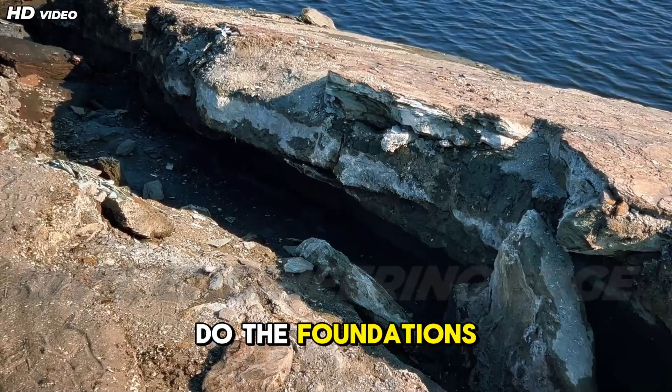Imagine a 20-mile bridge stretching across deep, storm-lashed ocean waters supporting thousands of vehicles every hour. Now imagine the earth beneath it rupturing violently. A magnitude 9 earthquake strikes without warning. What happens next? Do the towers snap? Do the foundations fail? Or does the bridge survive?

Welcome to Civil Engineering Edge, where today we dive into one of the most terrifying challenges in modern infrastructure: protecting colossal sea bridges from seismic annihilation. We're uncovering the groundbreaking seismic isolation systems, energy-dissipating technologies, and revolutionary foundation designs that allow these giants to defy the planet's most violent shudders. Stay with us because what keeps these titans standing will truly amaze you.

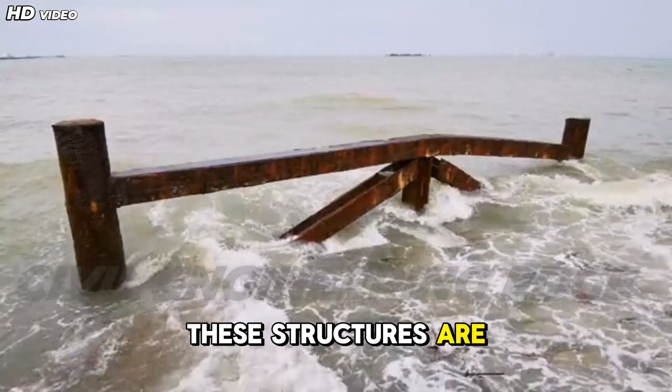Mega sea bridges represent the pinnacle of human ambition in civil engineering. Unlike conventional bridges, these structures are built in deep water, exposed to waves, currents, typhoons, corrosion, and most critically seismic forces originating beneath unstable seabeds. What makes these bridges extraordinary is not just their length or height, but the complex interaction of forces acting on them simultaneously. During an earthquake, a sea bridge doesn't just shake, it moves differently at every support, while water, soil, and structure respond together as a coupled system.

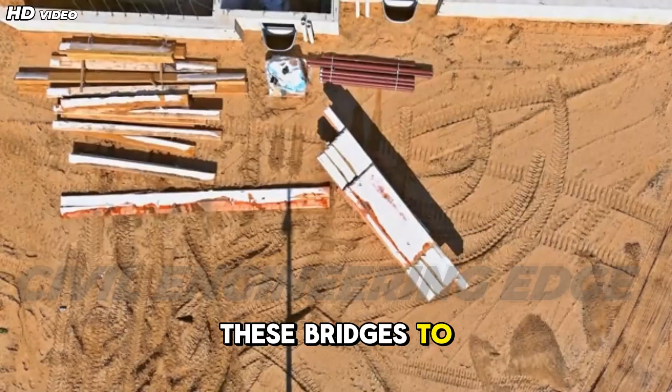This dynamic behavior demands a completely new design philosophy. Modern engineers no longer design these bridges to be rigid. Instead, they are engineered to move intelligently to absorb, redirect, and dissipate seismic energy without catastrophic failure. Flexible pylons, seismic bearings, dampers, and foundations capable of controlled deformation are now central to design.

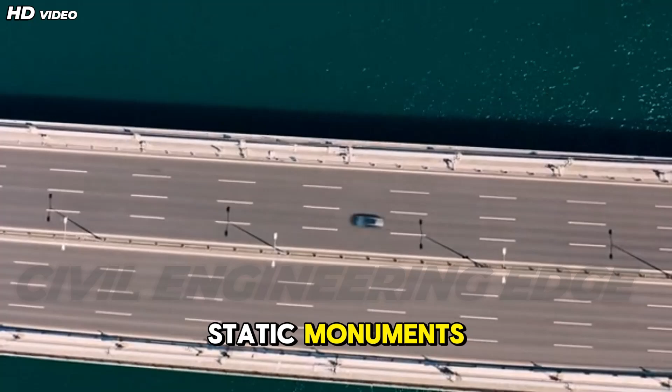Mega sea bridges are no longer static monuments of concrete and steel. They are living structural systems engineered to adapt to a shifting Earth. Every design decision from tower geometry to pile embedment depth is guided by performance-based seismic design, ensuring survival under worst-case earthquake scenarios. The impossible scale: why mega sea bridges in seismic zones are humanity's ultimate engineering challenge.

Building a mega sea bridge in a seismic zone is often described as engineering against nature itself. The scale alone is overwhelming: kilometers of span length, towers taller than skyscrapers, foundations embedded deep into the ocean floor. Now add earthquakes to the equation, and the challenge multiplies exponentially.

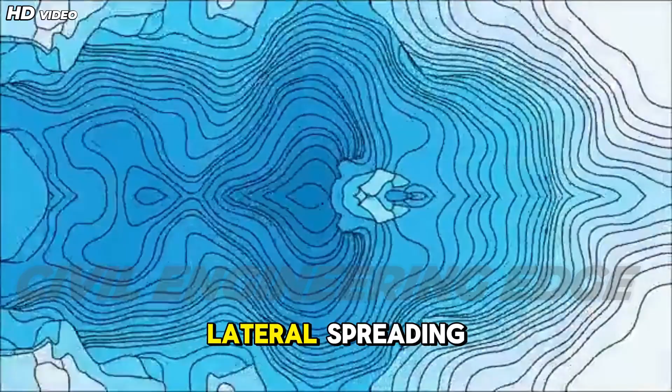Unlike land-based structures, sea bridges are founded on soft marine sediments, which amplify seismic waves and increase ground motion. Phenomena such as liquefaction, lateral spreading, and seabed fault rupture can occur simultaneously, threatening the stability of foundations. Traditional design assumptions simply do not apply.

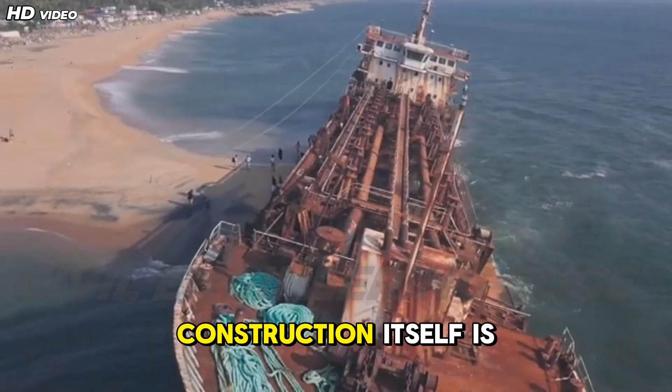Additionally, seismic waves do not arrive uniformly. One pier may experience peak acceleration seconds before another, creating asynchronous loading that twists and stretches the structure. Expansion joints, bearings, and cables must accommodate massive displacements without losing load-carrying capacity. Construction itself is a challenge, installing piles hundreds of meters long with millimeter-level precision in moving water, all while accounting for future seismic demands.

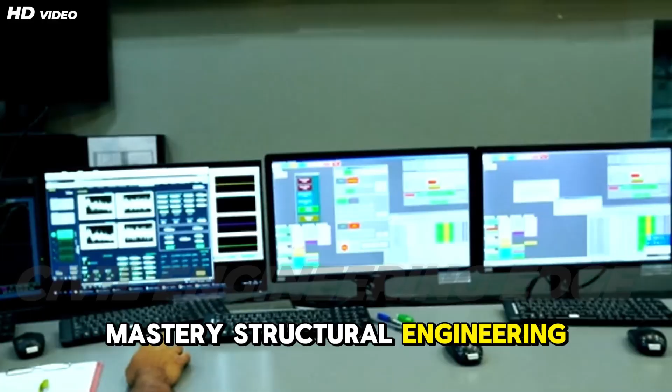This is why mega sea bridges in seismic zones are considered the ultimate test of civil engineering expertise. They demand interdisciplinary mastery: structural engineering, geotechnics, materials science, ocean engineering, and advanced computation working together in perfect harmony. Bridging continents, defying quakes: iconic mega bridges pushing the limits.

Some of the world's most ambitious sea bridges are already proving that seismic resilience is achievable. Take the Hong Kong-Zhuhai-Macau Bridge, a 55-kilometer megalink constructed in one of the world's most seismically active and typhoon-prone regions. Designed to withstand magnitude 8 earthquakes, it incorporates seismic isolation bearings, massive steel-concrete composite towers, and deep pile foundations socketed into bedrock. Japan offers even more striking examples.

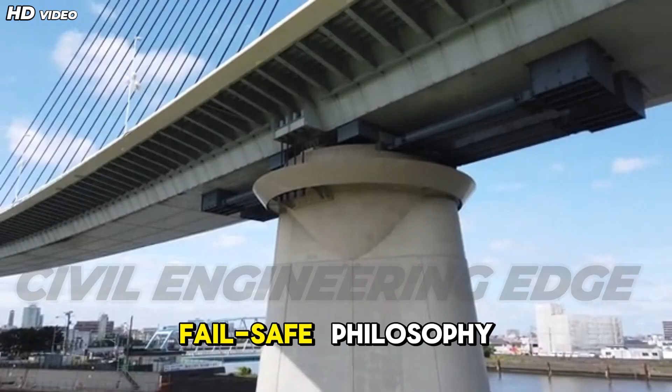Located on the Pacific Ring of Fire, Japanese sea bridges are engineered with a fail-safe philosophy. Structures like the Akashi Kaikyo Bridge use tuned mass dampers, flexible steel towers, and advanced seismic sensors that allow controlled movement during earthquakes, preventing collapse while preserving structural integrity.

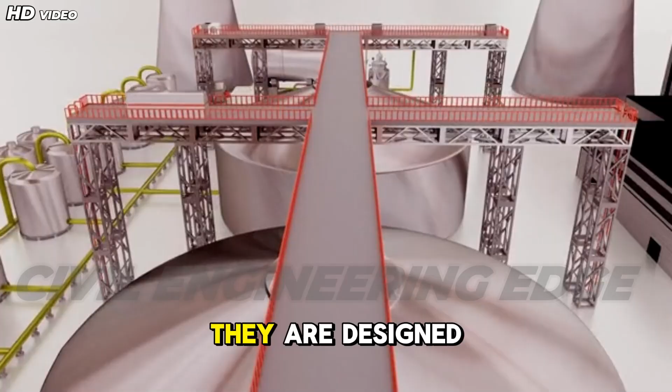What unites these bridges is not brute strength, but intelligent flexibility. They are designed to deform without breaking, dissipating seismic energy through bearings, dampers, and sacrificial elements. These projects demonstrate that with the right technology and design philosophy, engineers can bridge continents while defying earthquakes, setting new global benchmarks for resilient infrastructure.

The invisible threat: seismic risks anchored in volatile ocean floors. The most dangerous enemy of mega sea bridges is not visible, it lies beneath the ocean floor. Marine seismic conditions are uniquely complex. Earthquake waves travel through layers of water, soft sediments, fractured rock, and fault zones before reaching the structure. These layers distort, amplify, and prolong ground motion, subjecting foundations to extreme cyclic loads.

One of the greatest risks is soil liquefaction, where saturated sand temporarily behaves like a liquid during shaking. This can cause piles to lose lateral support, leading to excessive displacement or even collapse. Fault rupture beneath foundations poses another severe threat, capable of offsetting piles and piers by meters.

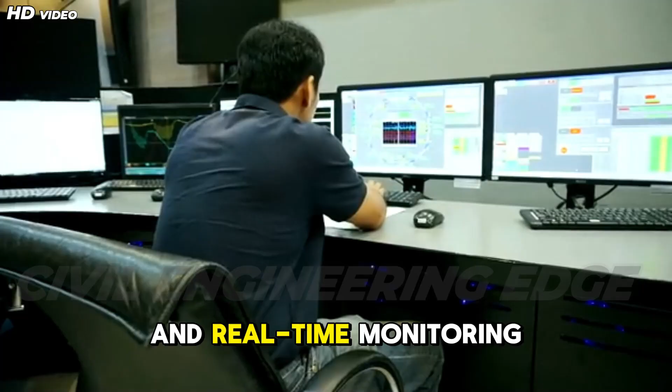Engineers combat these invisible dangers using deep-seated foundations, ground improvement techniques, seismic isolation at the foundation level, and real-time monitoring systems. Advanced numerical modeling such as nonlinear time history analysis and soil-structure-fluid interaction simulations allows engineers to predict how bridges will behave during extreme events before construction even begins. Understanding and controlling these hidden seismic risks is what transforms mega sea bridges from vulnerable giants into resilient lifelines capable of standing strong when the Earth itself turns hostile.

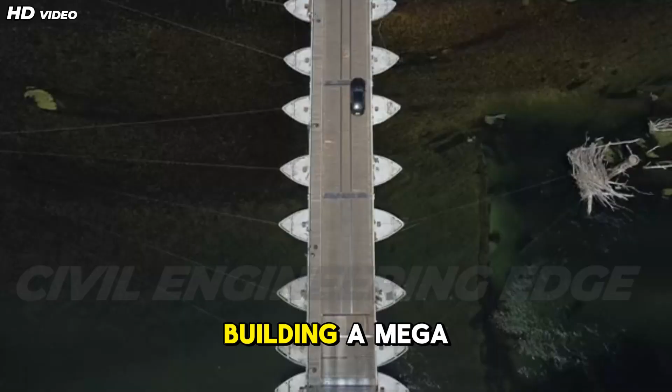The impossible scale. Why mega sea bridges in seismic zones are humanity's ultimate engineering challenge. Building a mega sea bridge in a seismic zone is often described as engineering against nature itself. The scale alone is overwhelming: kilometers of span length, towers taller than skyscrapers, foundations embedded deep into the ocean floor. Now add earthquakes to the equation, and the challenge multiplies exponentially.

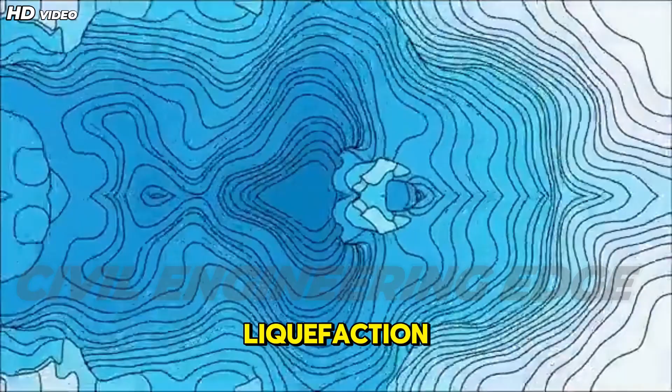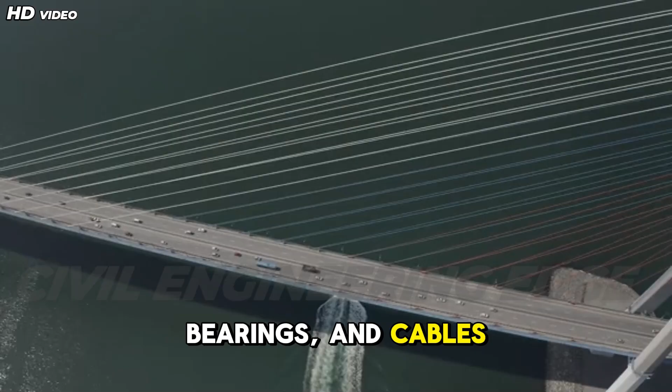Unlike land-based structures, sea bridges are founded on soft marine sediments, which amplify seismic waves and increase ground motion. Phenomena such as liquefaction, lateral spreading, and seabed fault rupture can occur simultaneously, threatening the stability of foundations. Traditional design assumptions simply do not apply. Additionally, seismic waves do not arrive uniformly. One pier may experience peak acceleration seconds before another, creating asynchronous loading that twists and stretches the structure. Expansion joints, bearings, and cables must accommodate massive displacements without losing load-carrying capacity.

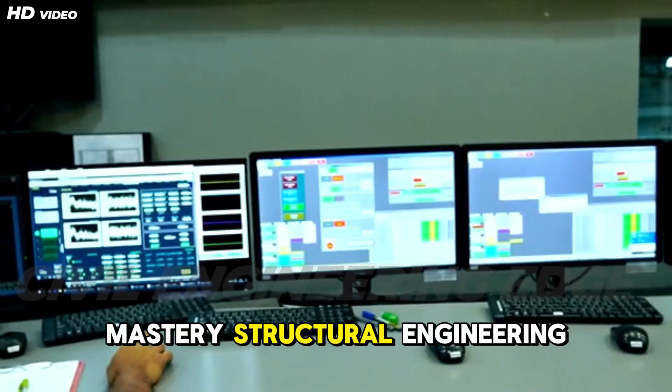Construction itself is a challenge, installing piles hundreds of meters long with millimeter-level precision in moving water, all while accounting for future seismic demands. This is why mega sea bridges in seismic zones are considered the ultimate test of civil engineering expertise. They demand interdisciplinary mastery: structural engineering, geotechnics, materials science, ocean engineering, and advanced computation working together in perfect harmony.

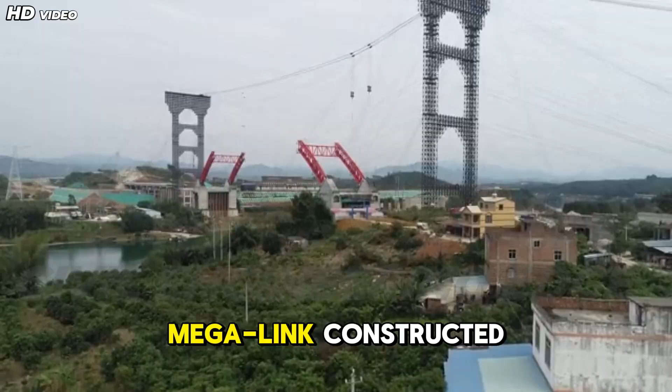Bridging continents, defying quakes: iconic mega bridges pushing the limits. Some of the world's most ambitious sea bridges are already proving that seismic resilience is achievable. Take the Hong Kong-Zhuhai-Macau Bridge, a 55-kilometer megalink constructed in one of the world's most seismically active and typhoon-prone regions. Designed to withstand magnitude 8 earthquakes, it incorporates seismic isolation bearings, massive steel-concrete composite towers, and deep pile foundations socketed into bedrock.

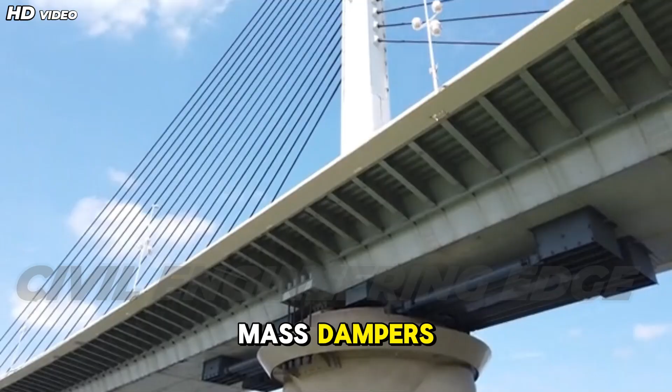Japan offers even more striking examples. Located on the Pacific Ring of Fire, Japanese sea bridges are engineered with a fail-safe philosophy. Structures like the Akashi Kaikyo Bridge use tuned mass dampers, flexible steel towers, and advanced seismic sensors that allow controlled movement during earthquakes, preventing collapse while preserving structural integrity.

What unites these bridges is not brute strength, but intelligent flexibility. They are designed to deform without breaking, dissipating seismic energy through bearings, dampers, and sacrificial elements. These projects demonstrate that with the right technology and design philosophy, engineers can bridge continents while defying earthquakes, setting new global benchmarks for resilient infrastructure.

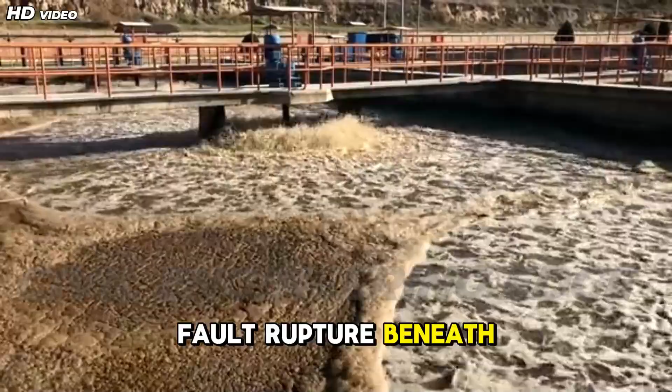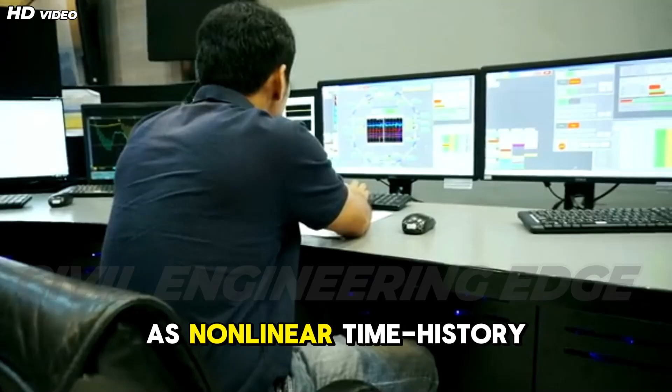The invisible threat: seismic risks anchored in volatile ocean floors. The most dangerous enemy of mega sea bridges is not visible, it lies beneath the ocean floor. Marine seismic conditions are uniquely complex. Earthquake waves travel through layers of water, soft sediments, fractured rock, and fault zones before reaching the structure. These layers distort, amplify, and prolong ground motion, subjecting foundations to extreme cyclic loads. One of the greatest risks is soil liquefaction, where saturated sand temporarily behaves like a liquid during shaking. This can cause piles to lose lateral support, leading to excessive displacement or even collapse. Fault rupture beneath foundations poses another severe threat, capable of offsetting piles and piers by meters. Engineers combat these invisible dangers using deep-seated foundations, ground improvement techniques, seismic isolation at the foundation level, and real-time monitoring systems. Advanced numerical modeling such as nonlinear time history analysis and soil-structure-fluid interaction simulations allows engineers to predict how bridges will behave during extreme events before construction even begins. Understanding and controlling these hidden seismic risks is what transforms mega sea bridges from vulnerable giants into resilient lifelines, capable of standing strong when the Earth itself turns hostile.

Dancing with tremors: the art of seismic isolation. When earthquakes strike, traditional thinking suggests resisting motion with brute strength. But modern seismic engineering follows a radically different philosophy: let the structure move, but control how it moves.

This idea lies at the heart of seismic isolation, a design strategy that allows mega sea bridges to dance with seismic forces rather than fight them. Seismic isolation works by decoupling the superstructure from destructive ground motion. Instead of transmitting earthquake energy directly from the foundation into the towers and deck, isolation systems act as a buffer layer. They filter and reshape seismic waves, dramatically reducing acceleration, internal forces, and structural damage.

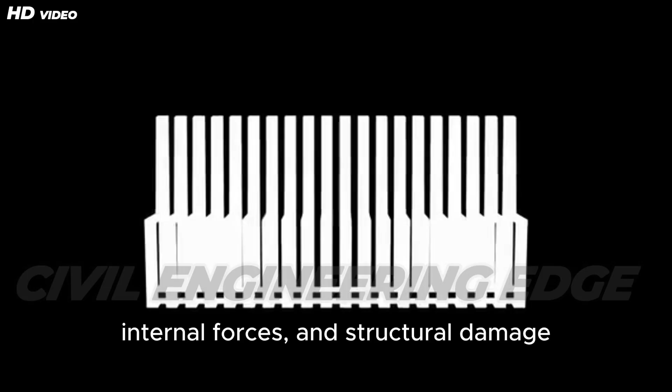For mega sea bridges, isolation is especially critical. Earthquake motions beneath the seabed are often amplified by soft marine soils and arrive asynchronously at different piers. Isolation systems allow each support to respond independently while preserving global stability. The result is a structure that moves smoothly, slowly, and predictably even during violent ground shaking.

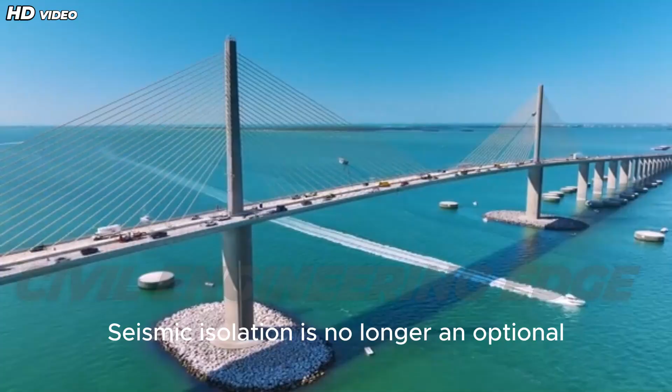Rather than sharp, brittle failure, isolated bridges exhibit large but controlled displacements, protecting key structural elements like pylons, cables, and deck connections. This approach not only prevents collapse, but also ensures post-earthquake serviceability, which is vital for emergency response and economic continuity. Seismic isolation is no longer an optional enhancement, it is an essential design philosophy for next-generation sea bridges in earthquake-prone regions.

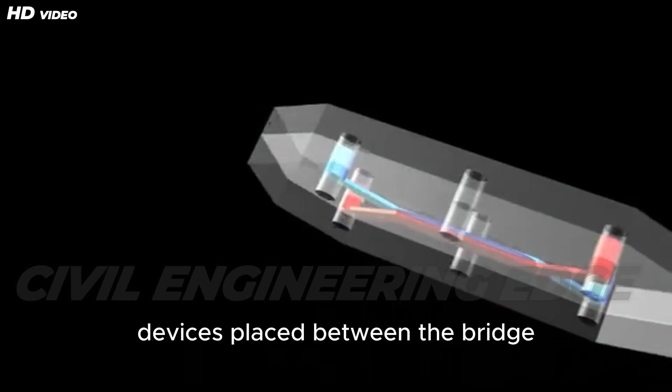Uncoupling the beast: how base isolation bearings let bridges float. At the core of seismic isolation are base isolation bearings, engineered devices placed between the bridge superstructure and its foundations. Their job is simple in concept, but revolutionary in impact: uncouple the bridge from ground motion. One of the most widely used systems is the lead rubber bearing (LRB).

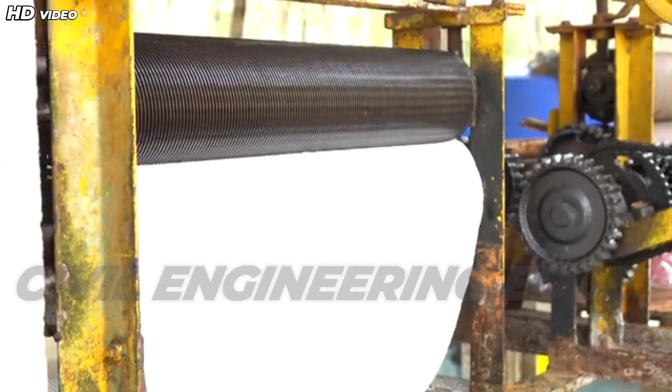These bearings consist of alternating layers of rubber and steel with a solid lead core at the center. During an earthquake, the rubber layers provide flexibility, allowing horizontal movement, while the lead core yields plastically, dissipating seismic energy as heat. This combination reduces transmitted acceleration while providing restoring force to recenter the bridge after shaking stops.

Another advanced system is the friction pendulum bearing (FPB). These bearings allow the bridge deck to slide along a curved, concave surface during seismic motion. The brilliance of this system lies in physics. The sliding motion increases the natural period of the structure, moving it away from the dominant earthquake frequencies. Gravity then acts as a natural restoring force, pulling the bridge back to its original position.

In mega sea bridges, these bearings can allow displacements of hundreds of millimeters without structural damage. To an observer, it appears as if the bridge is calmly floating, while the ground beneath it convulses violently. This intentional flexibility transforms earthquakes from catastrophic events into manageable motions, redefining how engineers protect massive structures.

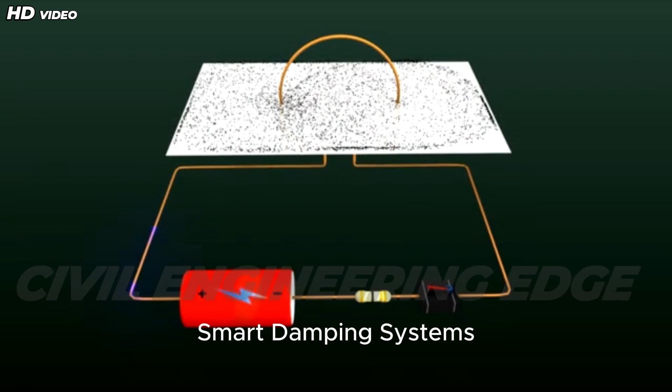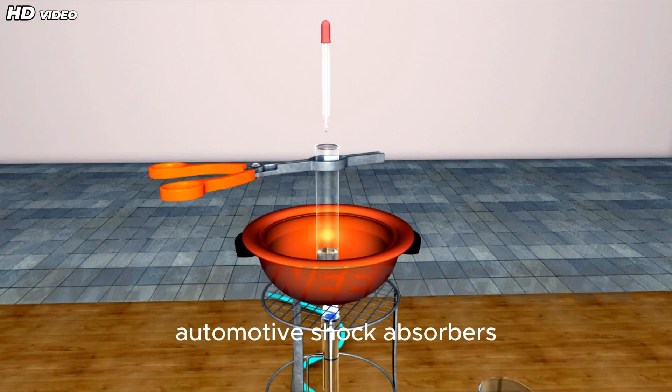Smart damping systems: viscous dampers and tuned mass dampers explained. While isolation systems reduce how much earthquake energy enters the structure, damping systems control what happens to the energy that does get in. This is where smart damping devices play a critical role. Viscous dampers function much like automotive shock absorbers. Filled with high viscosity fluid, these devices resist motion by converting kinetic energy into heat as fluid is forced through narrow orifices. During an earthquake, viscous dampers generate forces proportional to velocity, making them highly effective in reducing both displacement and acceleration.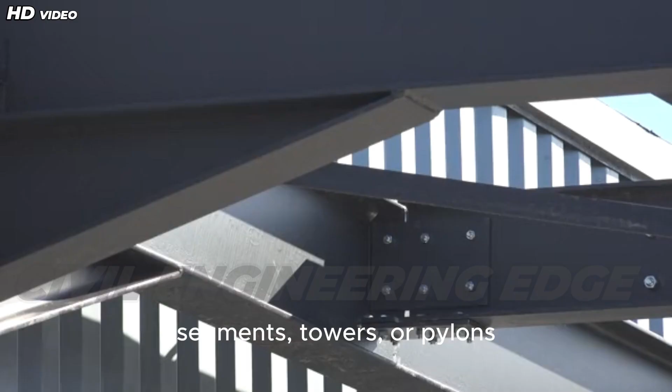In mega sea bridges, viscous dampers are often installed between deck segments, towers, or pylons. They are especially effective in controlling long-period motions common in large-span structures. Their performance is stable, predictable, and effective across a wide range of earthquake intensities.

Tuned mass dampers (TMDs) take a different approach. These systems consist of a large secondary mass, tuned to move out of phase with the bridge's primary vibration mode. When the structure begins to sway, the TMD oscillates in the opposite direction, canceling out motion and reducing amplitude. For sea bridges, TMDs are often placed inside towers or beneath decks to control wind and earthquake-induced vibrations. Together, viscous dampers and TMDs transform violent seismic energy into controlled, dissipated motion, protecting structural integrity and extending service life.

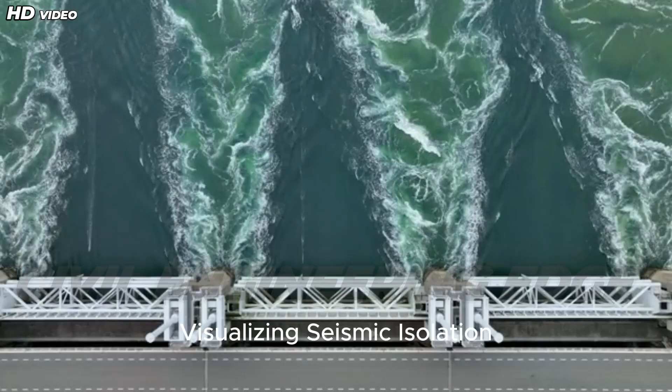Real-world application: visualizing seismic isolation through animated simulations. Understanding seismic isolation truly clicks when we see it in motion. Modern engineering relies heavily on animated simulations and digital twins to visualize how mega sea bridges behave during earthquakes. In these simulations, seismic waves propagate through the seabed, shaking the foundations violently. Without isolation, the bridge deck mirrors this motion: rapid acceleration, large internal forces, and potential failure points.

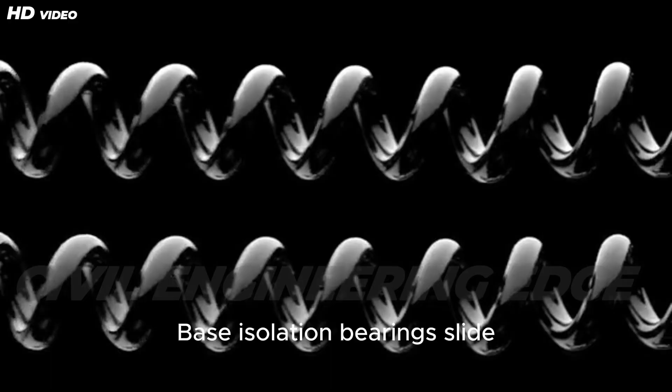But when isolation systems are activated, the difference is dramatic. The foundation moves aggressively, yet the deck above glides smoothly. Base isolation bearings slide, flex, and rotate, allowing controlled horizontal displacement. Viscous dampers glow in simulations as energy is absorbed and dissipated. Tuned mass dampers swing rhythmically, counteracting structural motion.

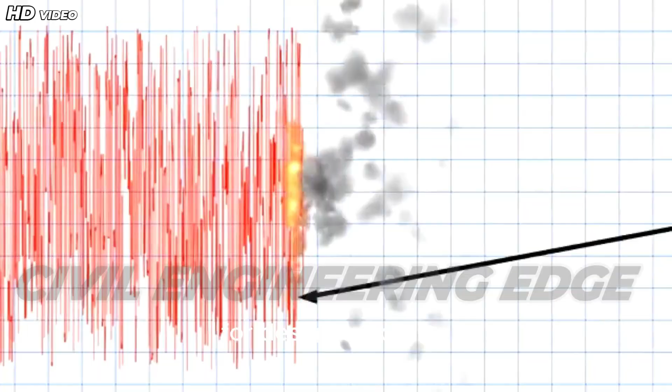Engineers use nonlinear time history analysis to simulate real earthquake records, sometimes thousands of scenarios, ensuring performance even under worst-case conditions. These visual tools are invaluable for design validation, stakeholder communication, and safety approval for students and professionals alike.

These simulations reveal a powerful truth. Seismic resilience is not about rigidity, it's about orchestrated motion. Mega sea bridges don't resist earthquakes. They dance with them, moving gracefully through chaos and emerging intact.

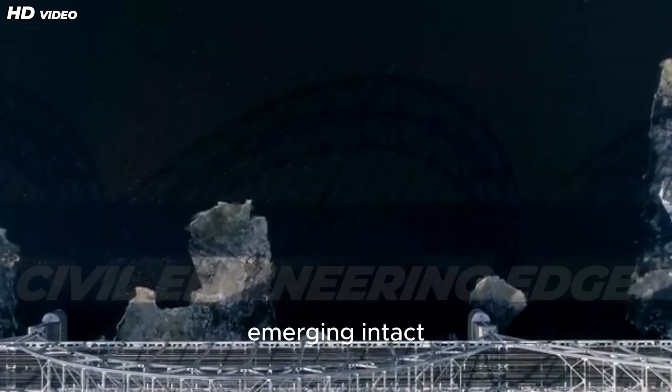Groundbreaking foundations, anchoring giants to the deep. For mega sea bridges, the most critical structural elements are the ones no one sees. Hidden beneath waves and sediment, foundations carry the fate of the entire structure. When earthquakes strike, superstructures may sway and isolate, but if foundations fail, collapse is inevitable.

Unlike land-based bridges, sea bridges are anchored into complex, layered marine geology: soft clays, loose sands, fractured rock, and active fault zones. Seismic waves passing through these layers amplify motion, generate pore water pressure, and threaten stability. Engineers must therefore design foundations not just for strength, but for survivability under extreme deformation.

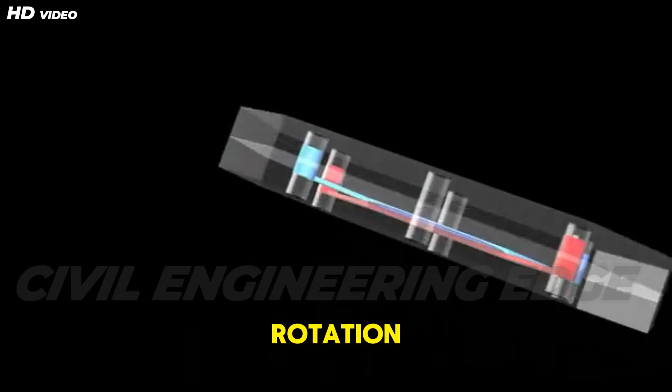Modern foundation design embraces redundancy, ductility, and adaptability. Engineers allow controlled rotation, bending, and energy dissipation at the foundation level while preventing brittle failure. This approach transforms foundations from passive supports into active seismic-resisting systems.

Advanced geotechnical engineering has made it possible to anchor massive pylons in depths exceeding 100 meters, ensuring stability even under combined loads from earthquakes, waves, currents, and ship impact. These foundations are the silent guardians of mega sea bridges, enduring forces far beyond what the eye can see.

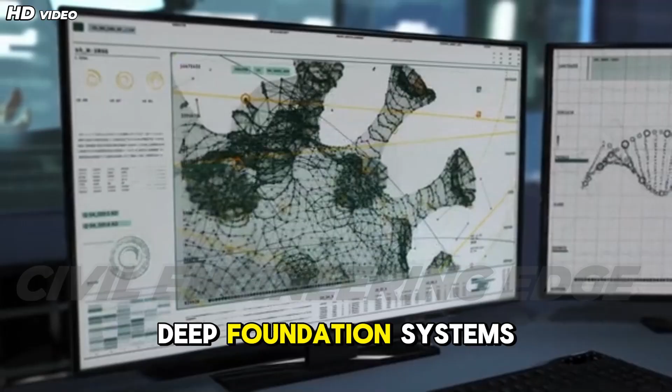Beyond bedrock: deep foundations in challenging marine geology. In many marine environments, reaching competent bedrock is either impractical or impossible. Instead, engineers rely on innovative deep foundation systems capable of performing reliably in weak or highly variable soils.

Large diameter drilled shafts, often exceeding 6 to 10 meters in diameter, are among the most effective solutions. These shafts extend deep into the seabed, developing capacity through a combination of end bearing and side friction. During seismic events, their massive stiffness and ductility allow them to resist lateral loads and bending moments while accommodating cyclic deformation.

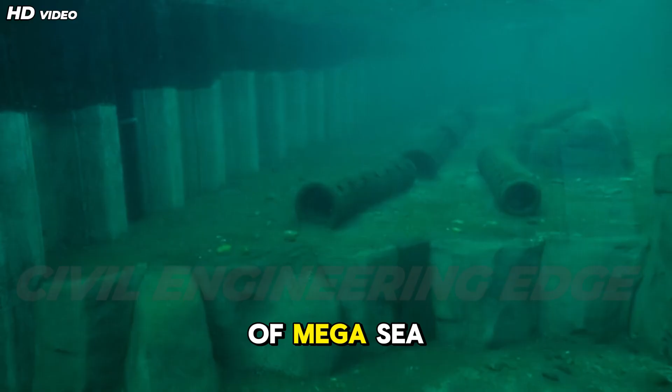Caisson foundations, both open and pneumatic types, are another cornerstone of mega sea bridge construction. These hollow, box-like structures are sunk into the seabed and filled with reinforced concrete, forming extremely stable bases. Caissons distribute loads over large areas, reducing stress concentration and improving seismic performance.

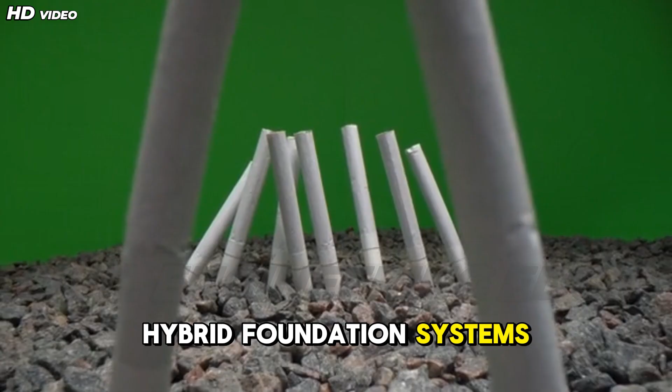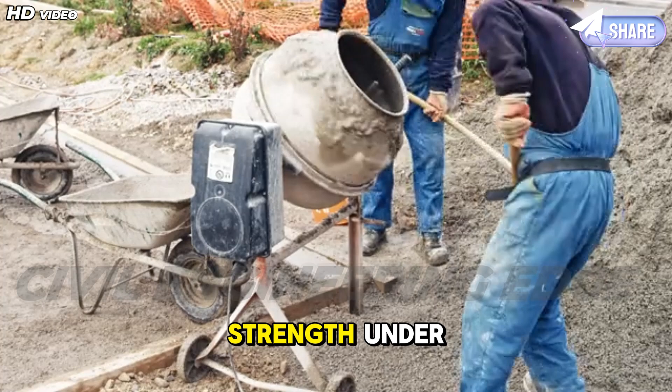Liquefaction and scour mitigation, defending foundations during earthquakes. Two of the most destructive threats to sea bridge foundations during earthquakes are soil liquefaction and scour, often occurring simultaneously. Liquefaction happens when saturated, loose soils lose strength under seismic shaking, behaving temporarily like a fluid. This can lead to loss of lateral support, excessive settlement, tilting, or even collapse of bridge piers.

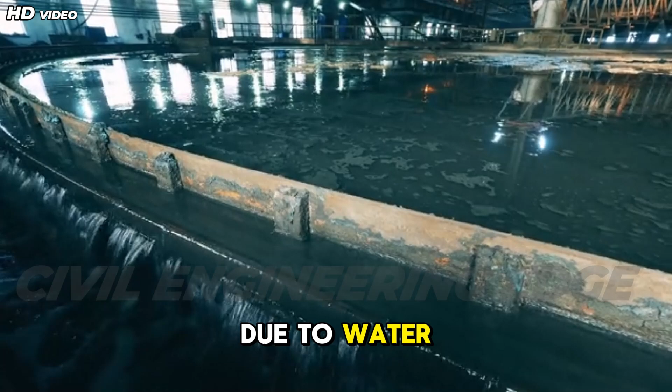To combat this, engineers employ ground improvement techniques such as vibrocompaction, stone columns, deep soil mixing, and jet grouting. These methods densify soil, increase shear strength, and reduce pore water pressure buildup. Scour, the erosion of soil around foundations due to water flow, becomes even more severe during earthquakes when soil structure is disturbed.

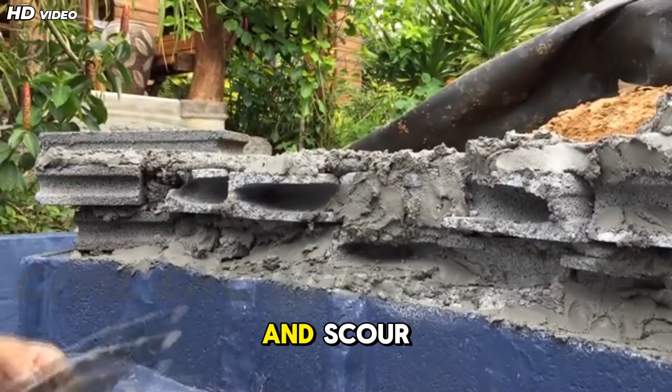Engineers counter this by designing armored protection systems, including rock riprap, concrete mattresses, and geotextile filters around piers. Advanced strategies integrate seismic and hydraulic design, ensuring foundations remain stable under combined earthquake shaking and aggressive water movement. In some cases, sacrificial scour layers are designed to erode while preserving structural integrity beneath. By proactively addressing liquefaction and scour, engineers ensure that foundation performance remains predictable even in the chaotic conditions of a major seismic event.

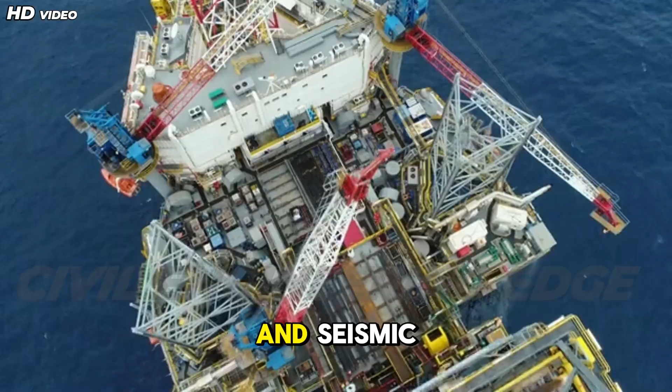Pioneering geotechnical insights, advanced site investigation, and soil modeling. Modern foundation design for mega sea bridges begins long before construction. It starts with unprecedented levels of site investigation and modeling. Engineers deploy offshore boreholes, cone penetration tests (CPT), geophysical surveys, and seismic reflection profiling to map subsurface conditions in extraordinary detail. These investigations reveal soil layering, fault lines, pore water pressures, and dynamic soil properties critical for seismic design.

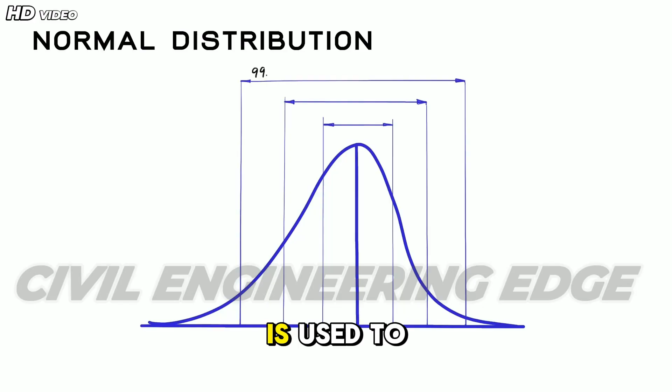Data from these studies feed into advanced numerical models, including finite element and finite difference simulations. These models predict foundation response under extreme conditions. Probabilistic seismic hazard analysis (PSHA) is used to evaluate multiple earthquake scenarios, ensuring designs are robust against uncertainty. Engineers also develop performance-based geotechnical designs, focusing on acceptable deformation rather than absolute prevention of movement.

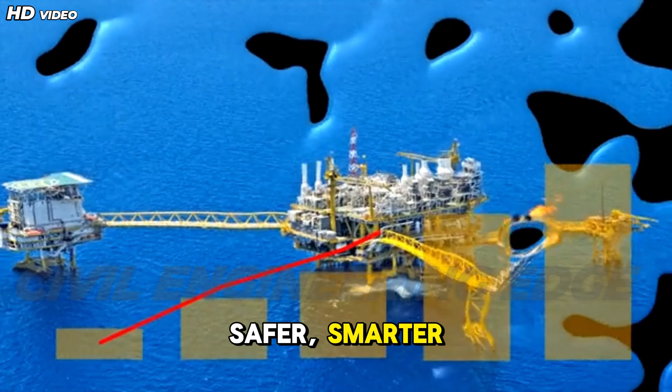These pioneering geotechnical insights allow engineers to predict how foundations will behave before the first pile is installed. The result is safer, smarter, and more resilient mega sea bridges anchored not just in concrete and steel, but in deep scientific understanding of the Earth itself.

Models capture soil-structure-fluid interaction, allowing engineers to simulate earthquake loading and liquefaction. Materials that endure, the future of bridge components. In the world of mega sea bridges, materials are no longer passive building blocks, they are active defenders against earthquakes, corrosion, fatigue, and time itself.

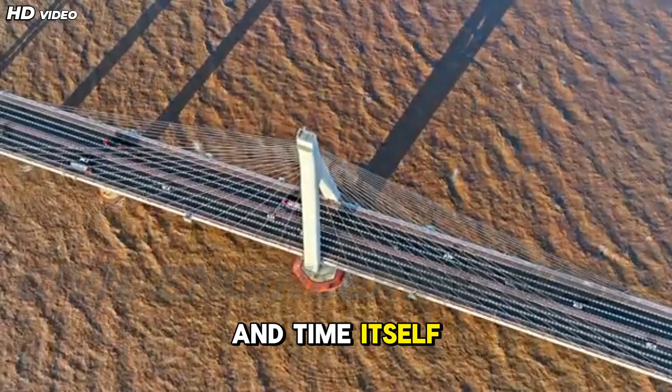As seismic demands intensify and service life expectations stretch beyond a century, traditional materials alone are no longer sufficient. Modern bridge engineering is witnessing a materials revolution. Engineers are now designing components that can sense damage, heal microcracks, and adapt dynamically under extreme loading. For seismic resilience, this shift is transformative.

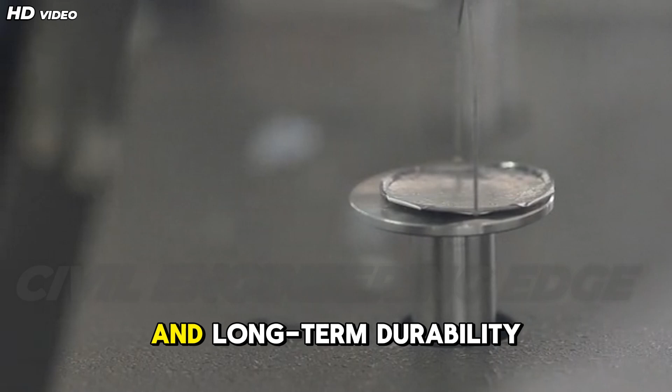Materials are engineered not just for strength, but for ductility, energy absorption, and long-term durability in hostile marine environments. Saltwater exposure, temperature variation, cyclic loading, and seismic shock create a uniquely aggressive setting. Advanced materials must resist corrosion while maintaining mechanical performance during earthquakes.

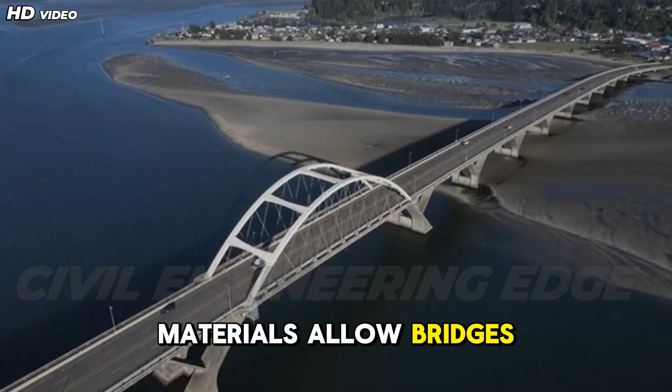The future of mega sea bridges lies in hybrid material systems, combining conventional concrete and steel with intelligent, high-performance alternatives. These next-generation materials allow bridges to withstand repeated seismic events with minimal degradation, significantly reducing life cycle costs and downtime. In seismic design, materials are no longer a limitation, they are a strategic advantage, redefining what is structurally possible.

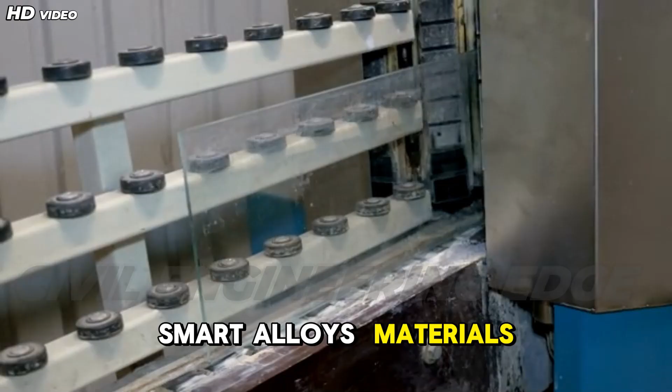Self-healing concrete and smart alloys, materials that fight back. One of the most promising breakthroughs in bridge engineering is self-healing concrete. Traditional concrete inevitably develops microcracks due to shrinkage, fatigue, and seismic loading. Left untreated, these cracks allow water and chlorides to penetrate, accelerating corrosion and weakening the structure.

Self-healing concrete addresses this vulnerability using embedded bacteria, microcapsules, or mineral admixtures. When cracks form and moisture enters, these systems activate, producing calcium carbonate that seals the cracks autonomously. For mega sea bridges, this means reduced permeability, improved durability, and enhanced seismic performance by preventing progressive damage.

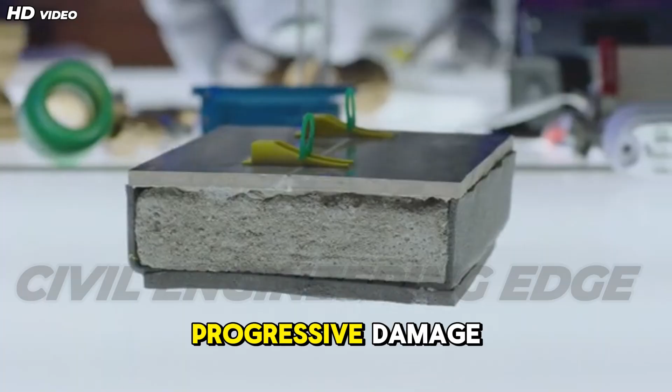Alongside concrete innovation, smart alloys, particularly shape memory alloys, are revolutionizing seismic design. These metals can undergo large deformations during earthquakes and then return to their original shape once loading is removed. This self-centering behavior is invaluable for bridge piers, connections, and dampers.

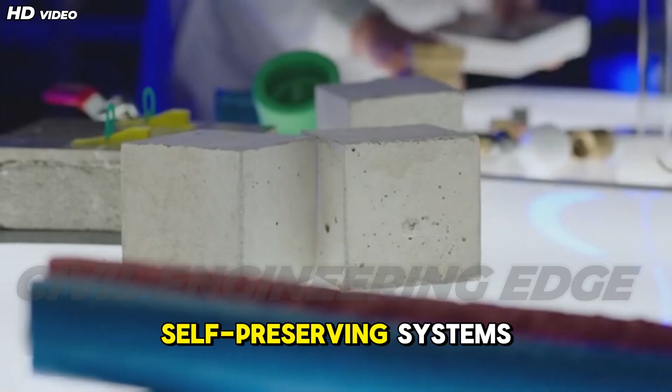In seismic events, SMAs absorb energy without permanent deformation, drastically reducing residual displacement. This allows bridges to remain functional immediately after earthquakes, an essential requirement for emergency response routes. Together, self-healing concrete and smart alloys transform bridges into self-preserving systems capable of resisting, recovering, and enduring seismic punishment far beyond conventional materials.

Fiber-reinforced polymers for strength without the weight. Fiber-reinforced polymers, or FRPs, are redefining how engineers think about strength, flexibility, and durability. Made from high-strength fibers such as carbon, glass, or aramid embedded in a polymer matrix, FRPs offer exceptional mechanical properties at a fraction of the weight of steel.

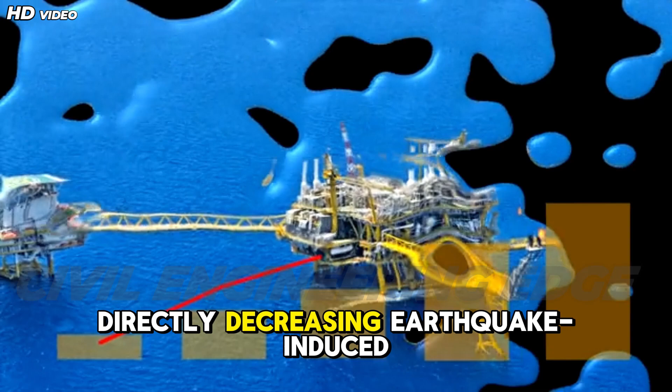For seismic applications, lightweight materials are a major advantage. Lower mass means reduced seismic inertia forces, directly decreasing earthquake-induced demands on foundations and piers. At the same time, FRPs provide outstanding tensile strength, fatigue resistance, and corrosion immunity critical in marine environments. FRPs are increasingly used for structural strengthening, seismic retrofitting, and even primary load-bearing components.

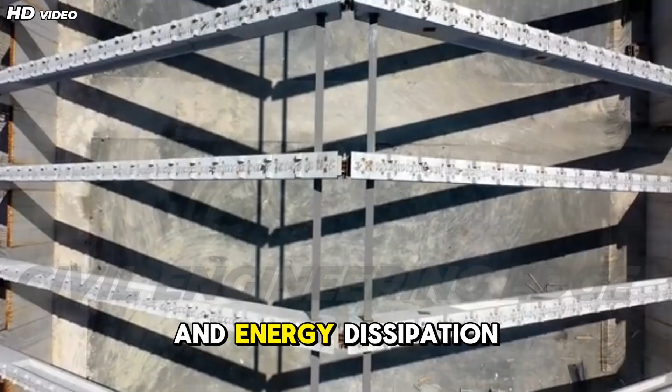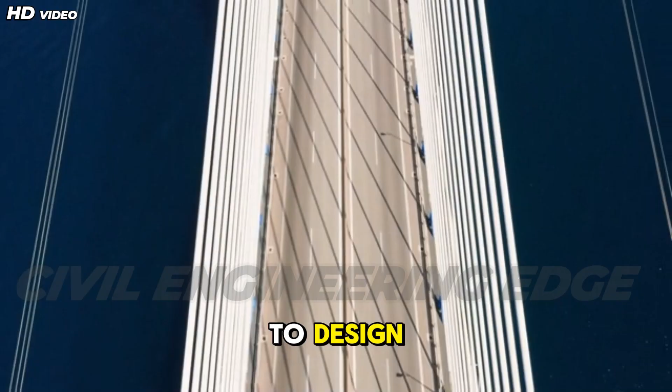Wrapping bridge columns with FRP enhances confinement, ductility, and energy dissipation capacity, allowing them to undergo large deformations without failure. In mega sea bridges, FRPs are also used in cable systems, decks, and protective coatings. Their flexibility allows controlled deformation during earthquakes, while their durability ensures long service life with minimal maintenance. By combining strength and flexibility, FRPs enable engineers to design structures that are not only resilient, but also efficient, ushering in a new era of lightweight, high-performance bridge construction.

Integrated sensing and structural health monitoring, bridges that think. The future of seismic resilience lies not just in stronger materials, but in smarter structures. Integrated sensing and structural health monitoring (SHM) systems transform mega sea bridges into intelligent assets capable of assessing their own condition in real time. Embedded sensors such as accelerometers, strain gauges, fiber optic sensors, and GPS systems continuously monitor vibrations, displacement, stress, and environmental conditions.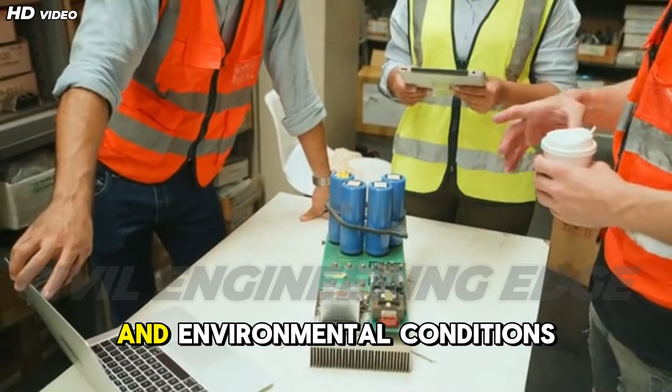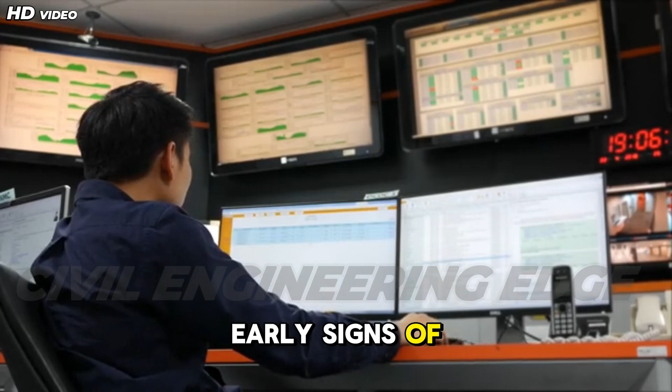During an earthquake, these sensors capture critical performance data, revealing how the bridge actually responds to seismic forces. This real-time feedback allows engineers to immediately assess damage, determine safety, and decide whether the bridge can remain operational. Beyond emergency response, SHM systems enable predictive maintenance, identifying early signs of deterioration long before visible damage occurs.

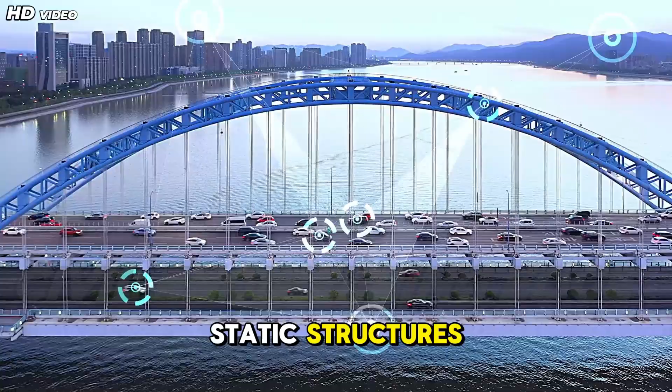Advanced analytics and AI algorithms process sensor data to detect anomalies, estimate remaining service life, and optimize inspection schedules. For mega sea bridges, this dramatically reduces maintenance costs and enhances safety. By integrating smart materials with sensing technology, bridges evolve from static structures into living systems: aware, responsive, and resilient. This intelligence is key to ensuring that next-generation sea bridges not only survive earthquakes, but continue serving society safely for decades to come.

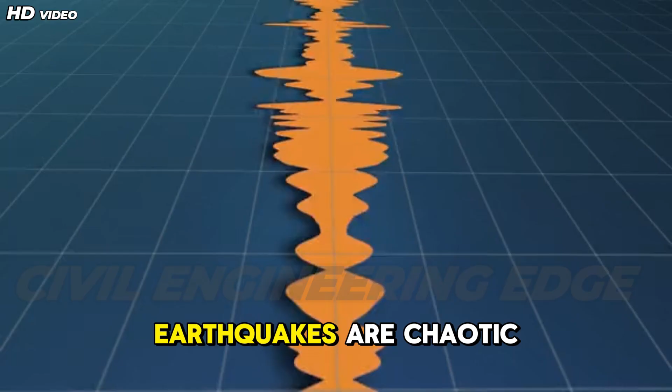The digital battlefield, simulating seismic survival. Before a single pile is driven into the seabed, today's mega sea bridges are already fighting earthquakes in the digital realm. This virtual battlefield is where engineers test ideas, push limits, and uncover weaknesses without risking lives or billions in infrastructure. Earthquakes are chaotic, unpredictable, and brutally complex. No two events are ever the same. To design bridges capable of surviving these forces, engineers rely on advanced computational tools that can simulate seismic behavior with extraordinary precision.

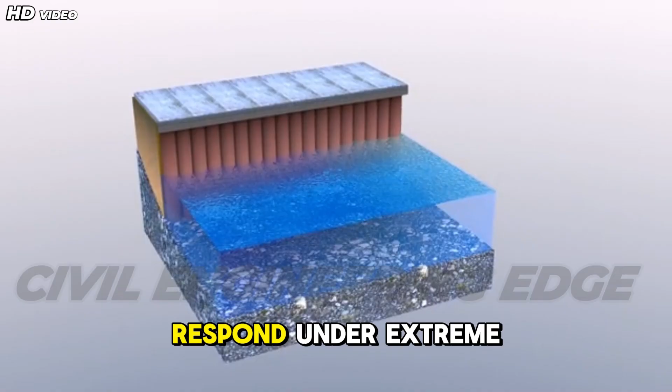The digital battlefield allows thousands of earthquake scenarios to be tested, refined, and optimized long before construction begins. Through high-performance computing, engineers model the interaction between ground motion, water, soil, foundations, and superstructure as a single integrated system. These simulations reveal how energy flows through a bridge, where stresses concentrate, and how isolation systems, dampers, and materials respond under extreme loading. In this digital space, failure is not catastrophic, it is educational. Every simulated collapse leads to stronger, smarter designs. The result is a new generation of mega sea bridges engineered not by guesswork, but by data-driven certainty.

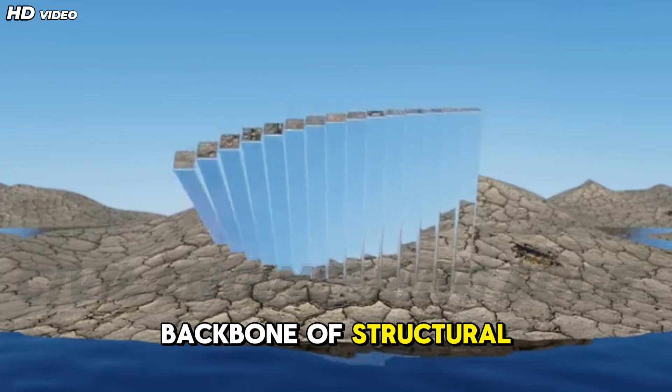Supercomputer simulations, CFD and FEA in earthquake modeling. At the heart of seismic simulation lies the power of supercomputers. Mega sea bridges involve millions of interacting variables, and only high-performance computing can process this complexity within practical timeframes. Finite element analysis (FEA) is the backbone of structural earthquake modeling. Engineers discretize bridges into millions of elements, each governed by material properties, geometry, and nonlinear behavior. Through time history analysis, real earthquake records are applied to the model, revealing stress, strain, displacement, and potential failure modes across the structure.

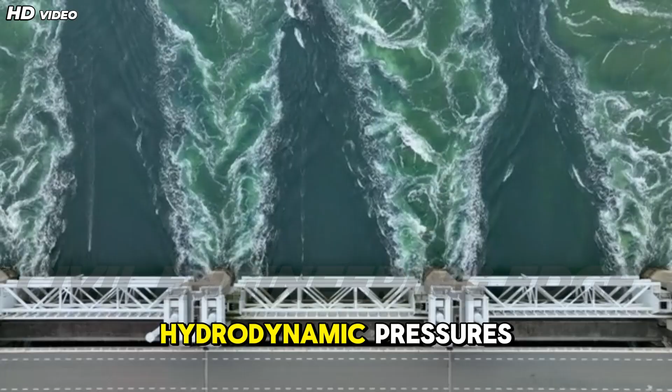Complementing FEA, computational fluid dynamics (CFD) models the behavior of water during seismic events. Earthquakes can induce hydrodynamic pressures, wave amplification, and fluid structure interaction effects that significantly influence bridge response, especially for submerged foundations and piers. By coupling CFD with FEA, engineers simulate how seismic waves propagate through soil, interact with water, and ultimately impact the bridge. This integrated approach captures effects that traditional design methods simply cannot. These simulations allow engineers to test extreme scenarios, rare but devastating earthquakes, ensuring bridges are not only code compliant but future-proof. Supercomputers turn uncertainty into insight, making the invisible forces of earthquakes visible and manageable.

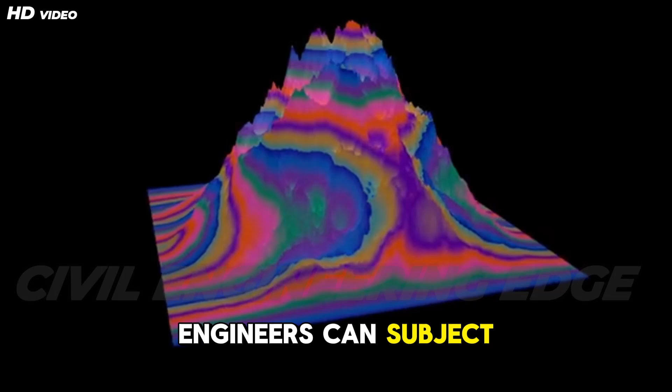Digital twins and predictive modeling, virtual replicas that learn. A digital twin is more than a 3D model. It is a living, evolving virtual replica of a real bridge. Built using design data, material properties, and sensor feedback, digital twins allow engineers to simulate and predict structural behavior throughout the bridge's entire life cycle. For seismic resilience, digital twins are revolutionary. Engineers can subject the virtual bridge to thousands of earthquake scenarios, varying magnitude, frequency content, fault location, and soil conditions. Each simulation refines the design, identifying vulnerabilities and optimizing performance.

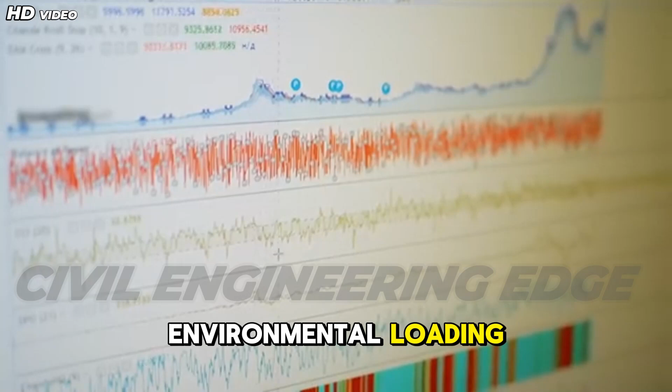Once the bridge is operational, real-time data from structural health monitoring systems continuously updates the digital twin. This allows engineers to compare predicted behavior with actual performance during minor tremors or environmental loading, improving accuracy over time. Predictive modeling enables what-if analysis. What happens if a stronger earthquake occurs? How will aging materials respond? Which components are most at risk? These insights guide maintenance strategies and retrofit planning. Digital twins shift seismic design from a one-time calculation to a continuous process, ensuring mega sea bridges remain resilient, not just on opening day, but for decades to come.

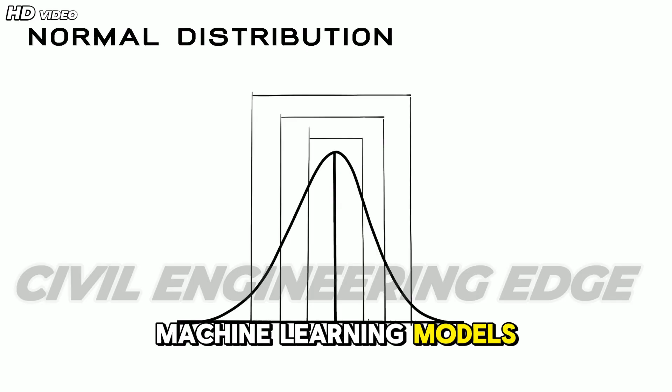The next frontier: AI and machine learning in seismic design. Artificial intelligence and machine learning represent the next seismic revolution in bridge engineering. Traditional simulations, while powerful, are computationally expensive and time-consuming. AI accelerates this process by learning patterns from vast data sets of simulations and real-world earthquake records. Machine learning models can predict structural response such as displacement, stress, or damage probability in seconds rather than hours. This enables rapid design iteration and early-stage optimization that was previously impossible.

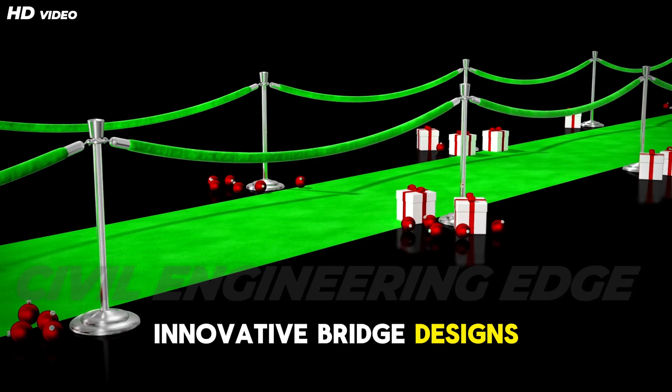AI is also transforming performance-based seismic design. By analyzing millions of potential scenarios, algorithms can identify optimal combinations of materials, isolation systems, and foundation layouts that maximize resilience while minimizing cost. In the future, AI-driven systems may automatically propose innovative bridge designs, evaluate seismic safety in real time, and even adapt control systems during earthquakes. Combined with digital twins and sensor data, AI enables self-learning infrastructure. For mega sea bridges, this means faster innovation, greater safety margins, and smarter decision-making, ushering in an era where bridges are not just engineered, but intelligently designed to survive Earth's most violent forces.

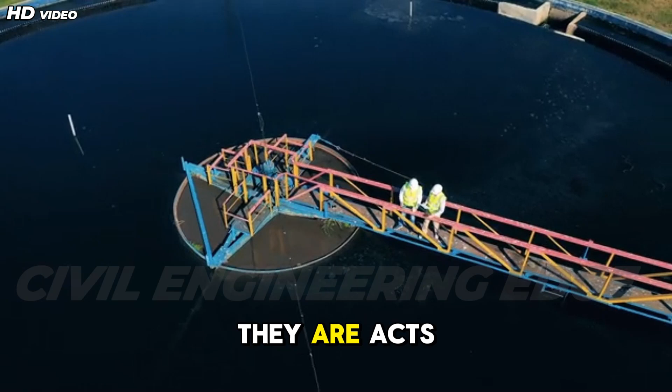Mega sea bridges are more than concrete and steel, they are acts of defiance against nature's extremes. From seismic isolation systems that allow graceful movement, to deep foundations anchored in unstable seabeds, to intelligent materials and AI-driven simulations, every component plays a role in seismic survival. What we've explored today is the future of civil engineering, a future where resilience is designed digitally, validated virtually, and perfected through innovation. These bridges stand as symbols of what humanity can achieve when science, technology, and imagination unite.